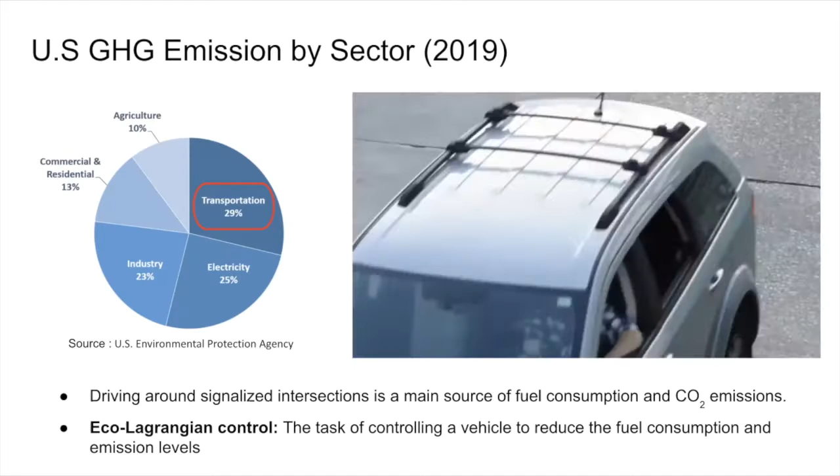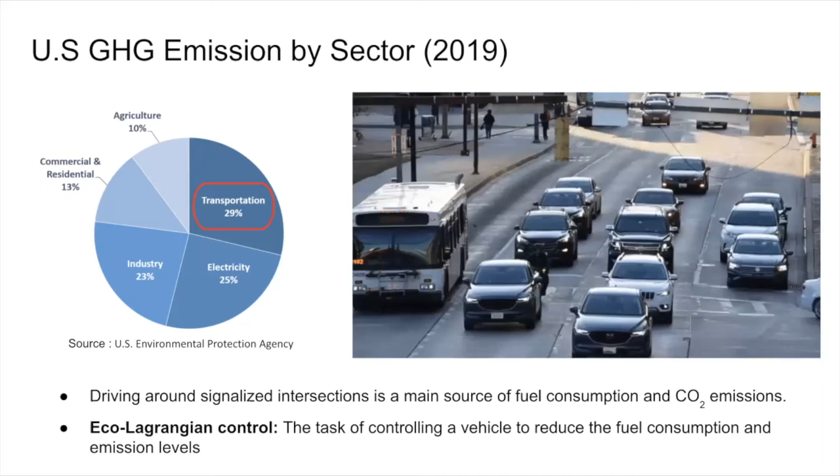Greenhouse gas emission levels and fuel consumption rates have been steadily rising, and the transportation sector in particular contributes 29%. Human driving at signalized intersections often creates shockwaves, causing high fuel consumption and emission, which call for energy-efficient driving strategies known as Eco-Lagrangian control or eco-driving.

Most work that studies eco-driving assumes a fleet of autonomous vehicles to carry out these strategies. However, fully autonomous vehicles are predicted to take more than another decade before they become widely adopted. A promising near-future solution is to generate human-compatible structured policies which humans can follow and execute. These policies should contain a simple action space, and any targeted action must be maintained for a fixed amount of time steps.

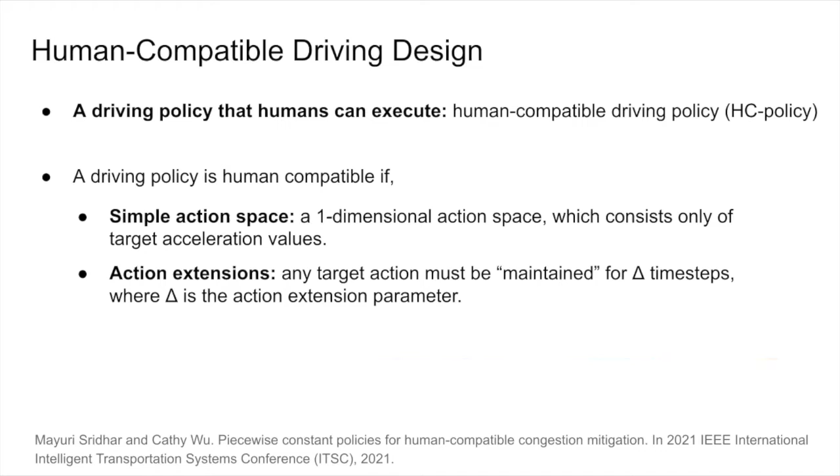Our objective of this project is to design eco-driving policies for when a vehicle approaches and leaves a signalized intersection. We look at two types of control policies, one for autonomous vehicles and the other for vehicles driven by humans who can execute a given set of instructions. In both cases, our overall objective is to reduce fuel consumption, carbon dioxide levels, and travel times. Additionally, the policies designed for human drivers should maintain human compatibility.

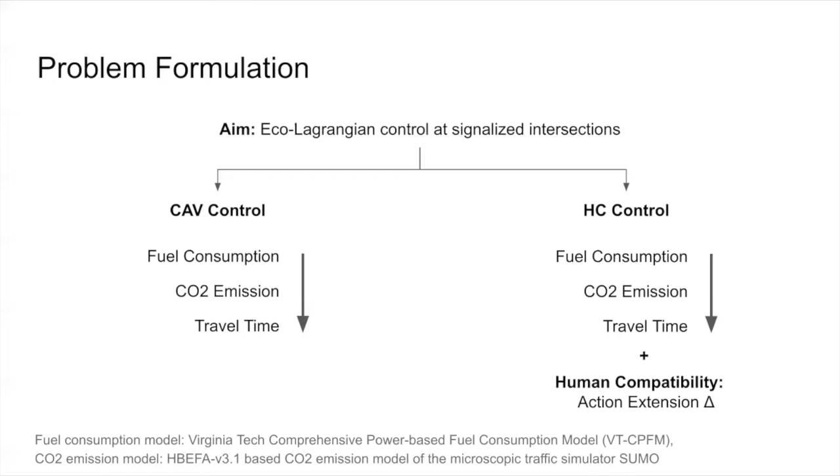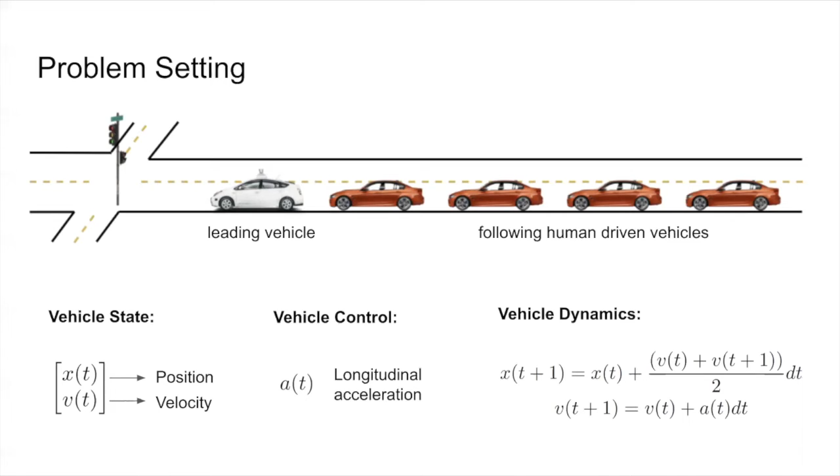We look at a platoon of vehicles approaching and leaving a signalized intersection that is led by a controlled vehicle. We simplify the vehicle dynamics to be the equations of motion, consider the state to be the position and velocity of the leading vehicle, and the control action to be the longitudinal acceleration.

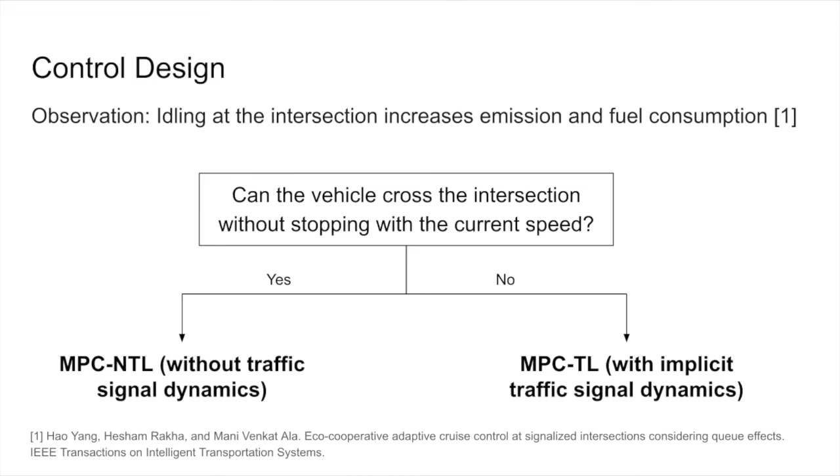Including the discrete dynamics of the traffic signal in our optimization can make the problem too computationally expensive for real-time execution. Therefore, we design our control algorithm based on the observation that idling at intersections can cause higher fuel usage and emission levels. We define two model predictive control methods based on the condition of whether the approaching vehicle can cross the intersection without stopping in its current speed. We define these two control models as MPC-NTL and MPC-TL.

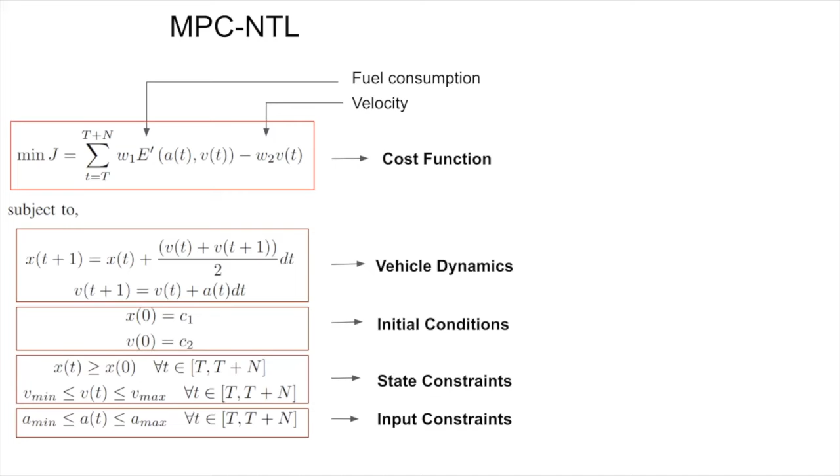Our MPC-NTL model assumes that the vehicle can cross the intersection without stopping and therefore contains no constraints related to the traffic signal dynamics. Then our objective is to reduce fuel consumption while increasing the travel speed subject to the vehicle dynamics, initial conditions, and the state and input constraints.

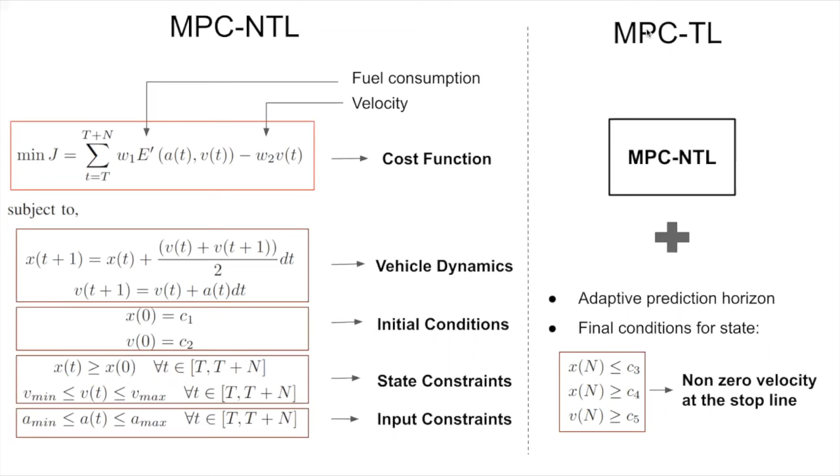In contrast, when the vehicle is expected to stop at the intersection due to the traffic signal, we use MPC-TL. Here we set an extra constraint to the MPC-NTL such that the vehicle should travel at a non-zero velocity at the stop line of the intersection.

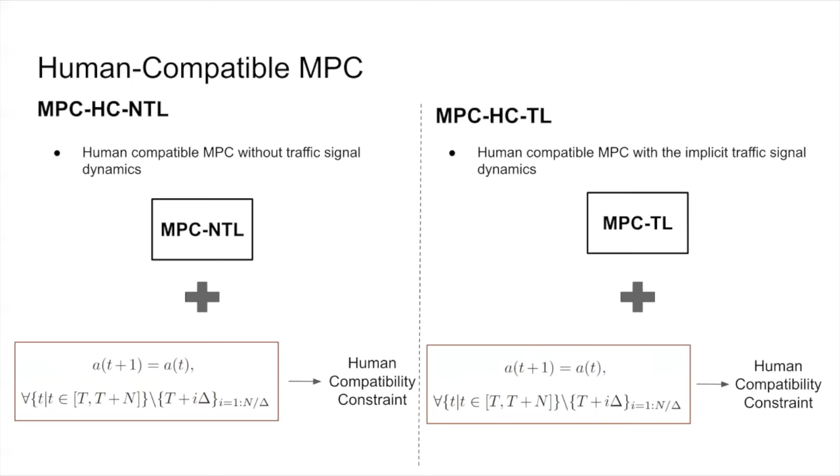Next, we extend our two MPC models with human-compatible constraints. We require each action to be maintained for a delta amount of time steps, making the resultant policy a zero-order hold policy. Here we can see our simulations. We use a baseline IDM model to imitate realistic human driving behaviors.

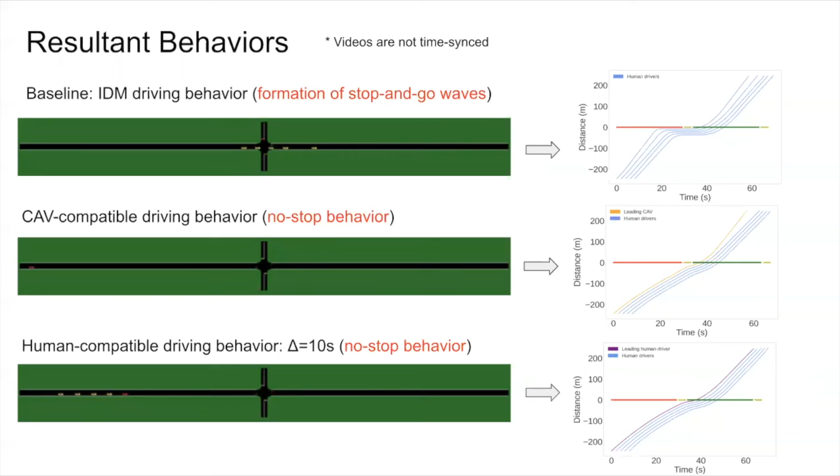As can be seen in the first video, the vehicles stop at the intersection, creating stop-and-go waves. The same behavior can be seen in the time-space diagram on the right. In the second video, where the autonomous vehicle leads, we see that the vehicles do not stop at the intersection, but rather just cruise through. Similarly, under the human-compatible driving policy, we see a no-stop behavior.

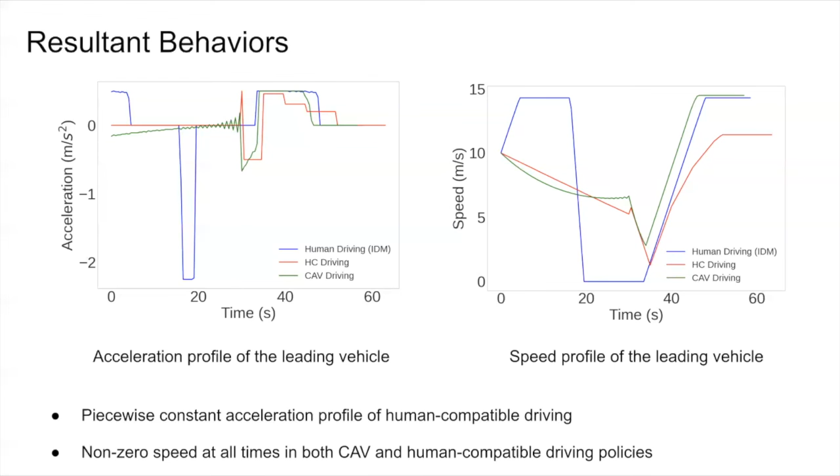Next, we also look at the trade-offs to be considered when designing human-compatible driving by varying the action extension delta parameter. In summary, if the delta is too large, both fuel consumption and travel speed can be significantly worse than human driving. We recommend practitioners find the optimal delta value that provides the best benefits under human compatibility constraints.

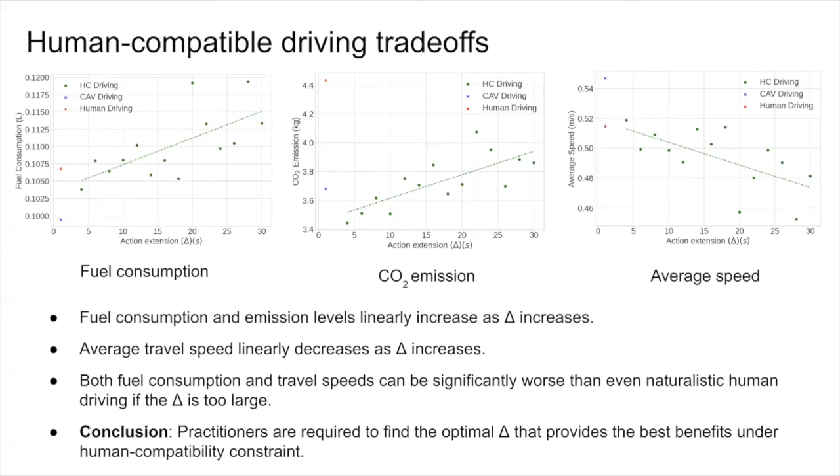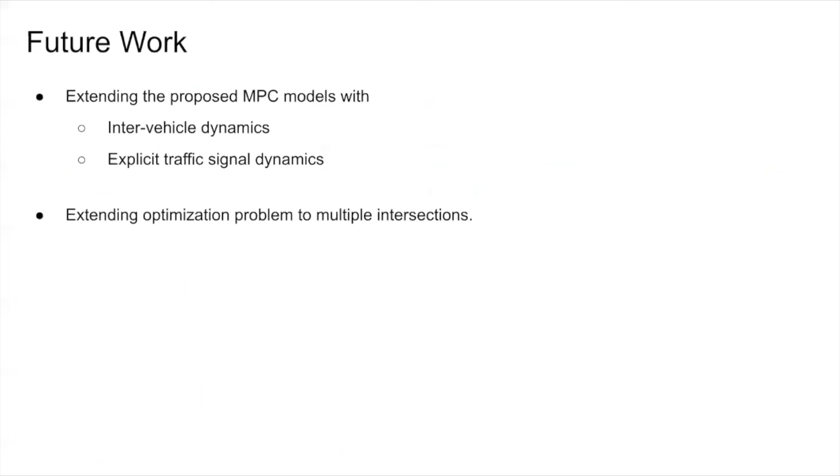One possible direction for future work is to include inter-vehicle dynamics and explicitly model the traffic signal dynamics in the control problem. Extending the optimization problem to multiple intersections is also an interesting direction.